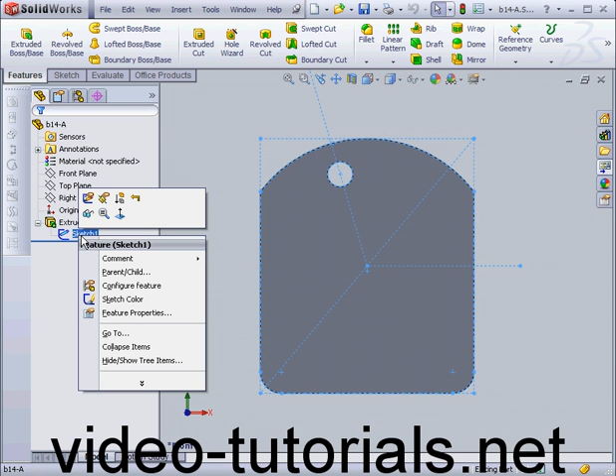Welcome to our tutorial about adding sketches to a drawing. First of all, let's see how this particular part was constructed. As you see, we've got construction geometry that helps to define the geometry of our part. Now let's exit the sketch.

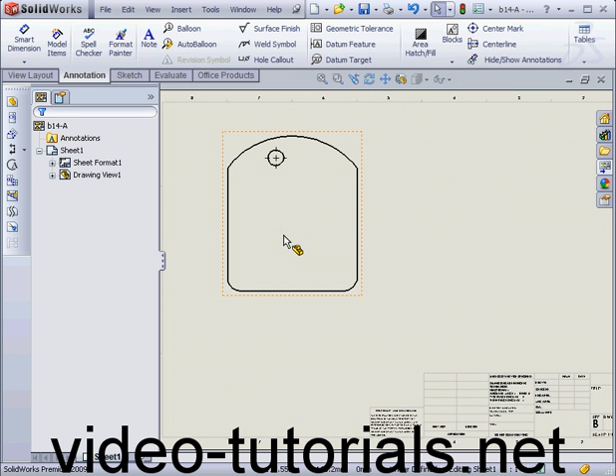And let's go to New Drawing, make Drawing from Part Assembly. Landscape B. In this tutorial, I'll just be using the front view. Let's click OK. Now let's go to the Sketch tab. First, I'll create a rectangle. In the Options control area, check for construction.

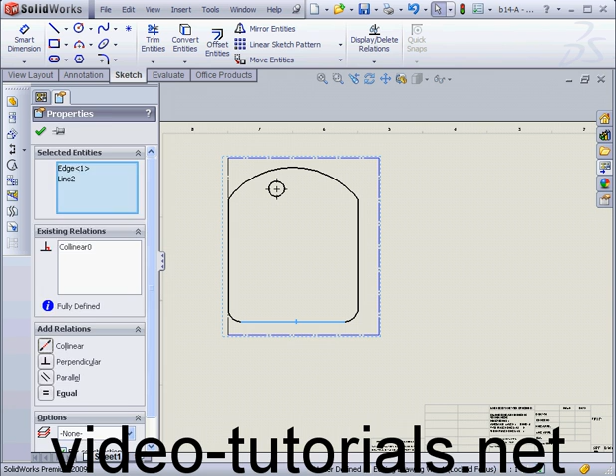Let's select this line and this line. Add a collinear relation. This line and this line, another collinear relation. This line, and shift select this one. Add another collinear relation. Now this curve and this line, create a tangent relation. OK.

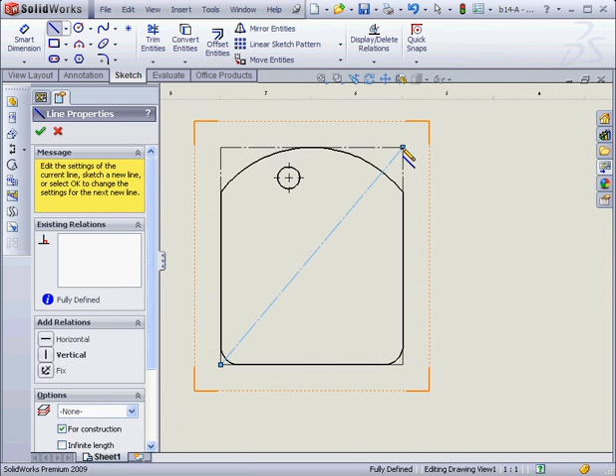Next, I'm going to use the center line tool. I want to create a line between these two corners. Right-click, select. I'm going to drop 2 points somewhere here. Let's use another center line now. I'm going to touch this line and create a line from the center of this line. Right-click, select. Next, let's go to the Annotation tab.

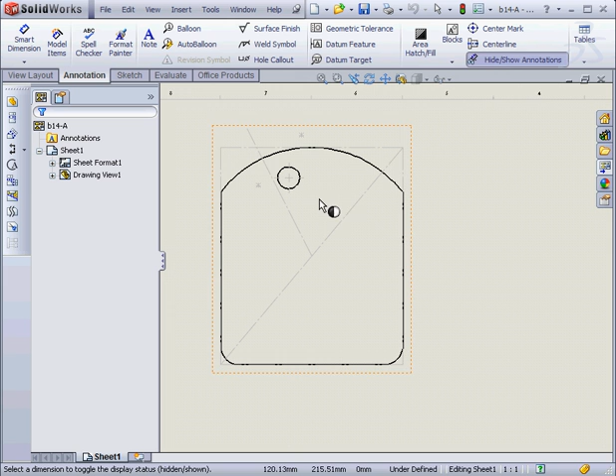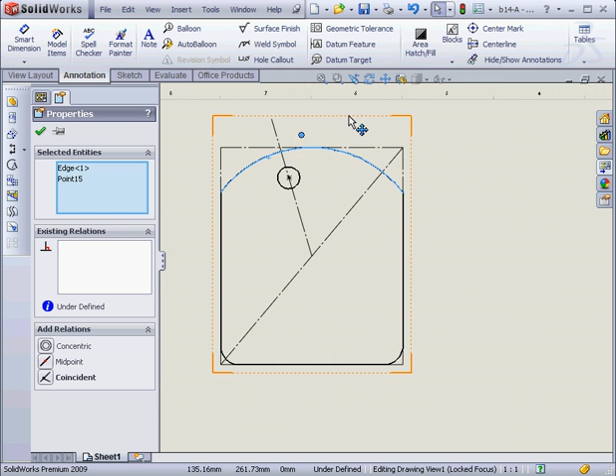Hide Show Annotations. I'm going to select this center mark. I'm going to hide it. Now I'll select this point and this curve. I'll add a concentric relation. Select this line and this point and add a coincident relation. Lastly, I'm going to select this point and this curve, as well as this line. I'll create an intersection relation.

Let's click OK. Let's add one more construction line here, center line. This one will be horizontal. Right-click, select. When you're adding sketches and dimensions to your drawing, you may find yourself in a situation where SolidWorks gives you a message. The sketch is overdefined, or asks you to make the dimensions driven, something like this, for example.

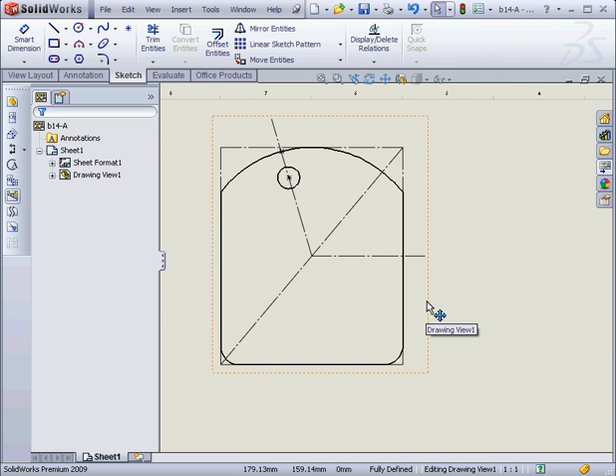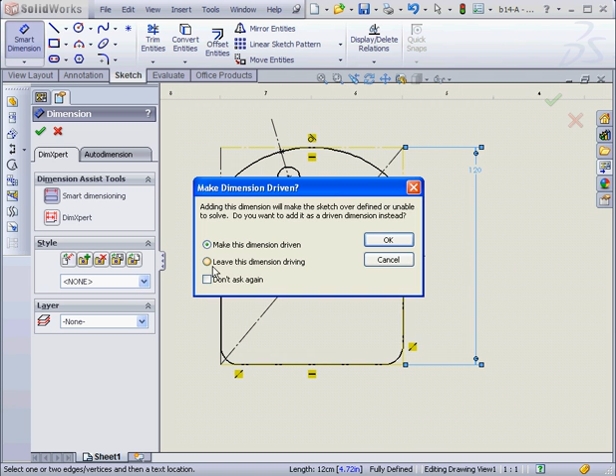Now, if I put a linear dimension right here, SolidWorks tells me that this dimension will make the sketch overdefined or unable to solve. Do I want to add it as a driven dimension instead? Well, yes. I'm going to delete this dimension and dimension our model. Let's show what happens if we opt to leave this dimension driving. What I end up with is an overdefined sketch. When I move the mouse in empty space, the sketch warnings disappear.

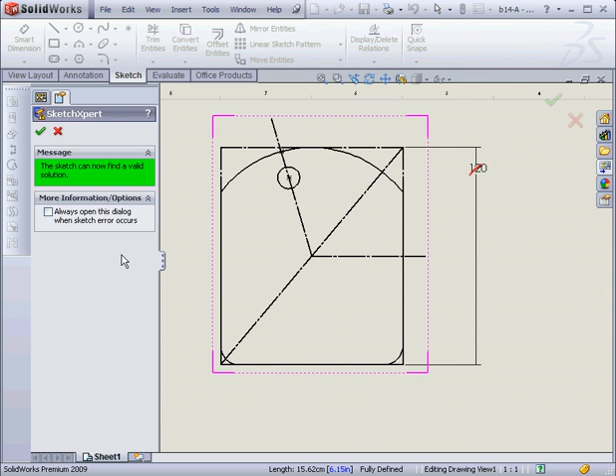Let's select the sketch. And let's double-click on the warning. Select Diagnose. The Diagnose window gives us 5 solutions. It suggests that we remove this tangency. Next, to remove the horizontal relations. To remove a dimension and a collinear relation. OK. Let's go back and remove this dimension. Accept. And the sketch is now OK.

Let's apply the rest of the dimensions. We'll put an angular dimension here. We'll make it dimension driven. Next, the distance between these 2 points. When I move my mouse, the dimension keeps changing. When I find the point where I get the dimension I need, I right-click, and that locks the dimension.

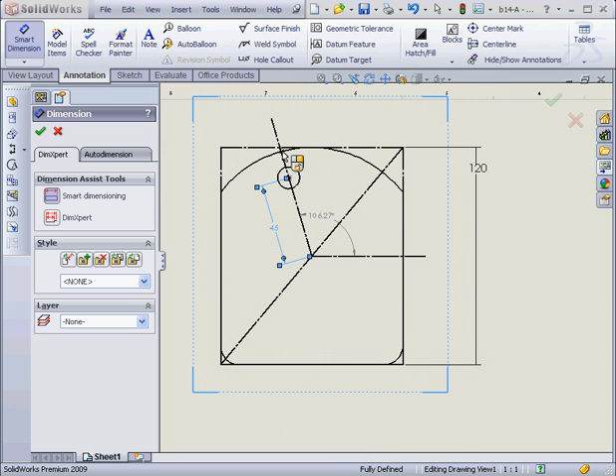If I want to unlock the dimension, I can just right-click again and then adjust it as needed. You relock the dimensions with another right-click. Let's make it dimension-driven. OK. Next, the distance between these 2 points. When I move my mouse, as you see, the dimension keeps changing.

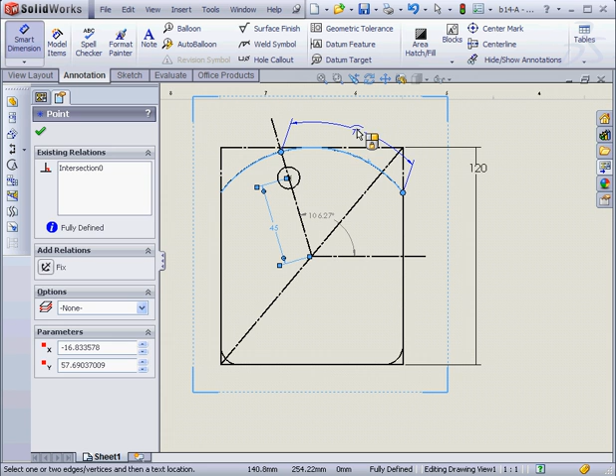What I want to happen here, I'd like this dimension to measure along this curve. I'll mouse over and then click on the curve. See how the dimension changes? I'll place it right here. Click OK.

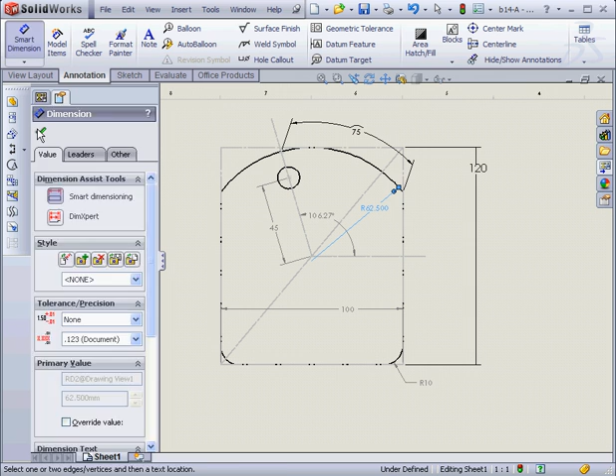And let's place a radial dimension right here. And then we'll specify the overall width. Make it dimension driven, OK. Lastly, I'll put a radial dimension right here. And this concludes our tutorial about adding a sketch to a drawing.